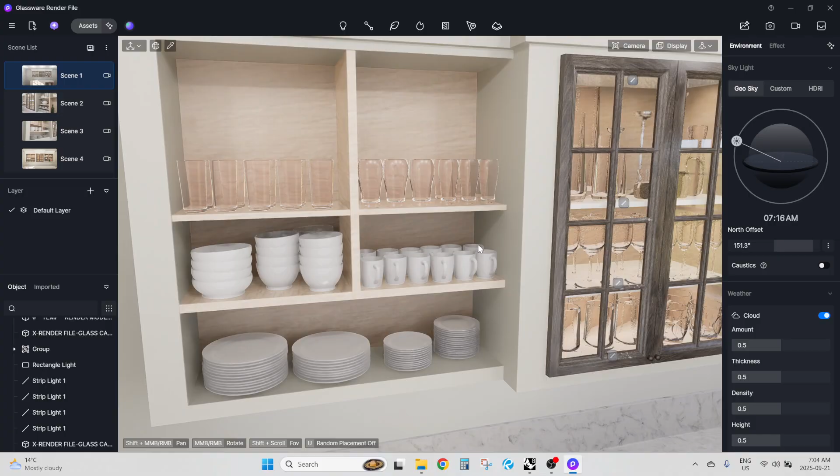In this video, I'm going to go over the first ever asset pack that I'm going to make available for Rhino 3D.

I created this because I was just getting killed on my rendering jobs where I need to model a bunch of small elements, and nothing you'll see is really that hard or that challenging to model.

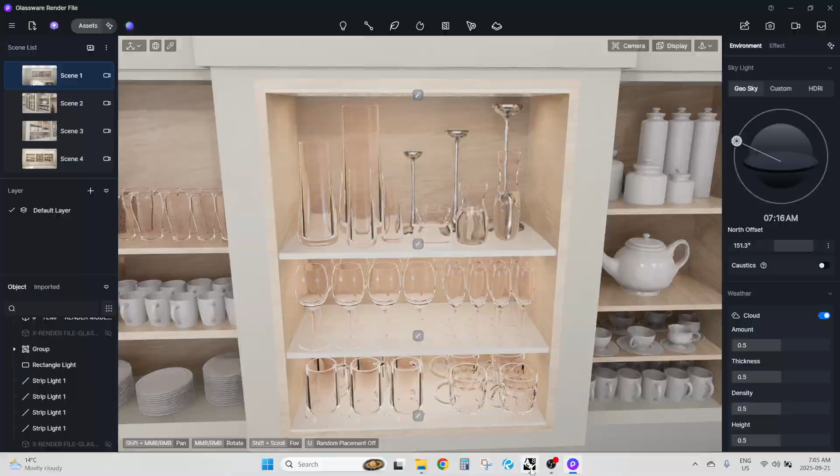Like a lot of these glasses, they might take a minute, but that's 1 minute, 2 minutes, 3 minutes. And then, to be honest, the real work goes into placing the objects, because you'll create your glass. Right now I believe I have the base point of these set at counter level. I think I'll have to reset the gumball to demonstrate that.

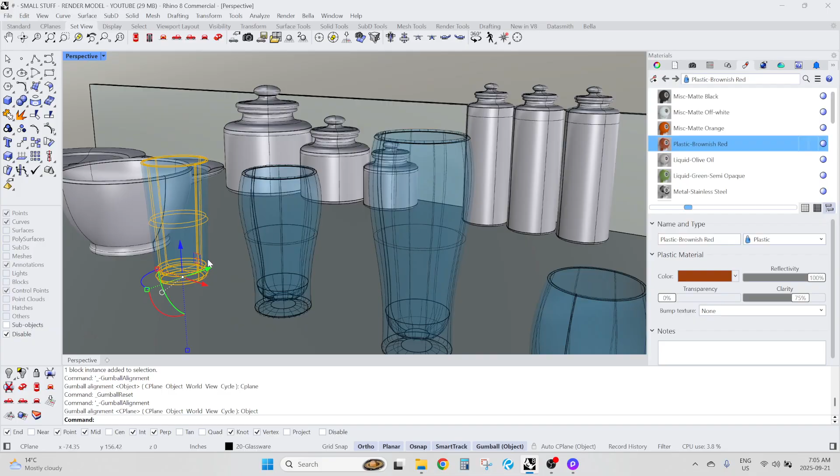And that in itself will save you quite a bit of time. So yeah, the real work is, I guess, just organizing and placing stuff.

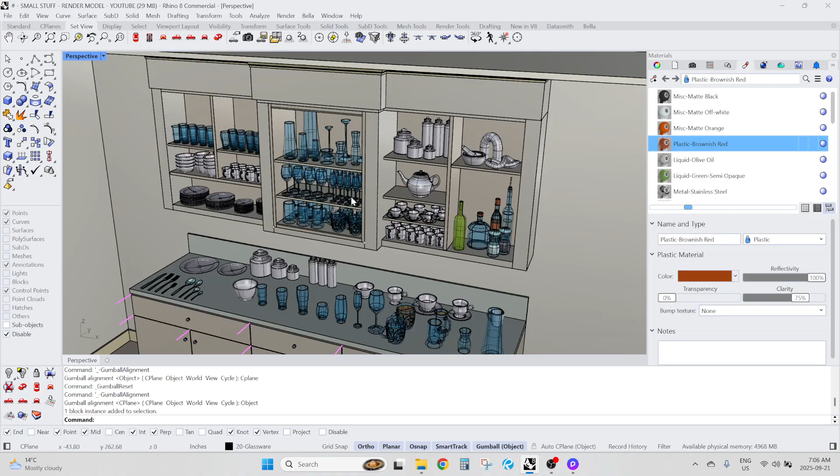So I found with other asset libraries, it's like they want you to take one item at a time, whether you import it into Rhino or download it one by one after scrolling through an asset library. I was just finding that so insanely slow. So I created this after dealing with that on a previous job, and I've used this once, and it's already saved me a whack of time.

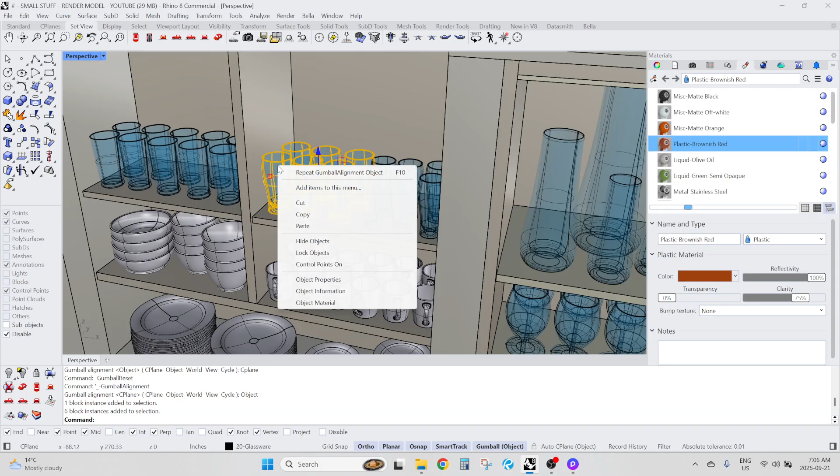But instead of, say, importing an object, all you'll do here is have two Rhino sessions open. You'll do Control C, copy, and then go into that other file, the one with your job in it or whatever you're working on, and then Control V. And of course, you'll have to place it, but that shouldn't be too challenging.

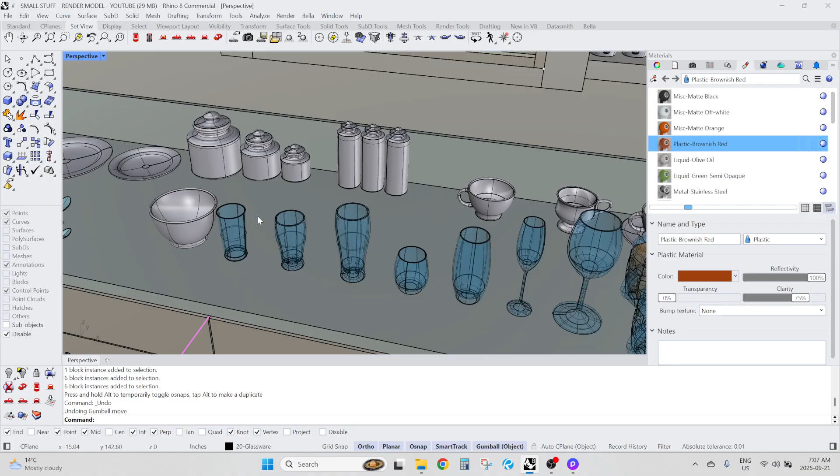Okay, so there's not a heck of a lot included in here. There's quite a bit of small, simple models, I guess, but you're going to run into situations where you need a slightly different shaped bowl, a slightly different shaped glass. These plates are actually the same block, just scaled, right?

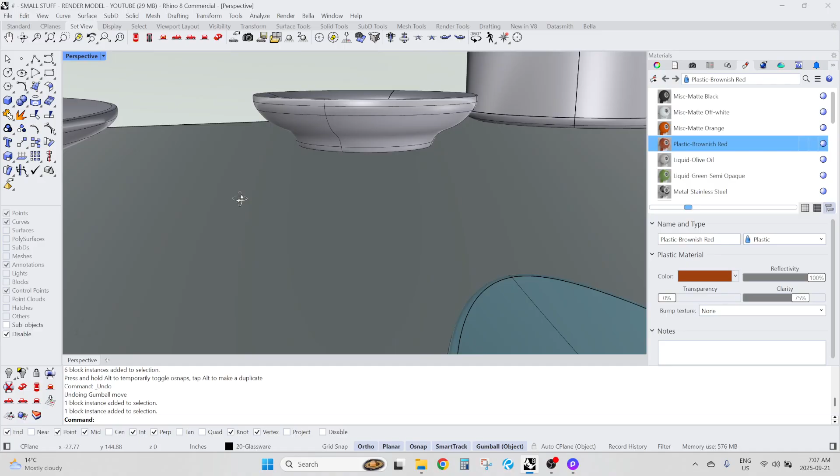So if I do 0.5, 0.5, now that almost looks like maybe a butter dish or something if we stretch that out like that, right? So you get a lot of flexibility just by modifying these blocks.

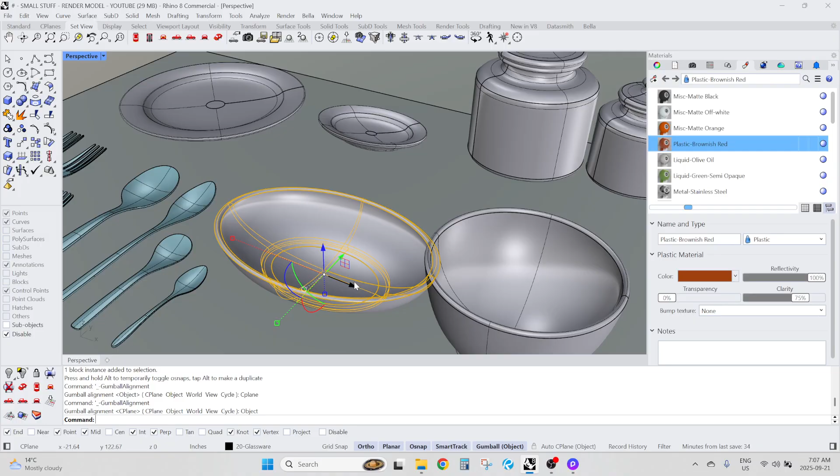We'll take this, make sure the base point's at the counter. I got a hotkey to switch the gumball alignment from C-plane to object. So do that, we'll do 0.5. Let's do 1.5. So that went from a cereal bowl looking thing to more like a bread bowl, I guess.

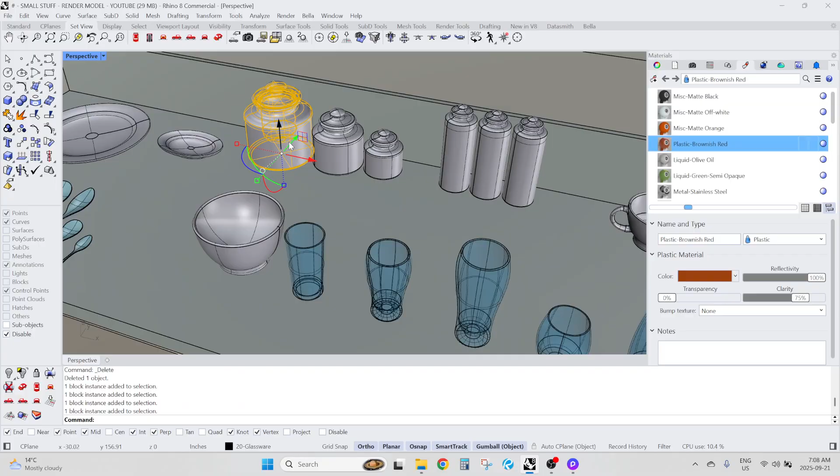Similar with glasses, you can change the shape of them. Some stuff, these are all the same block, but if I try to go from this to this, that won't work out too well. So let's scale this.

I kept accidentally hitting shift. So if you want to scale uniformly, you're going to hit shift and then click. But if you want to scale just one axis at a time, you'll just click and scale, right?

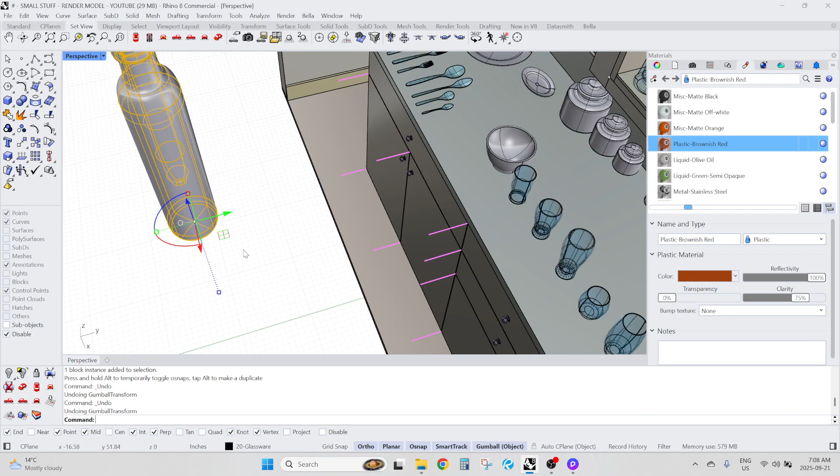But yeah, if I scale that, I don't think we want this bottle to look like that. It's more of a spice jar, I guess, but if we scale it like that, we create a bit of a mess. So in that case, what you do is explode, Control Shift select, and now we can just stretch that up.

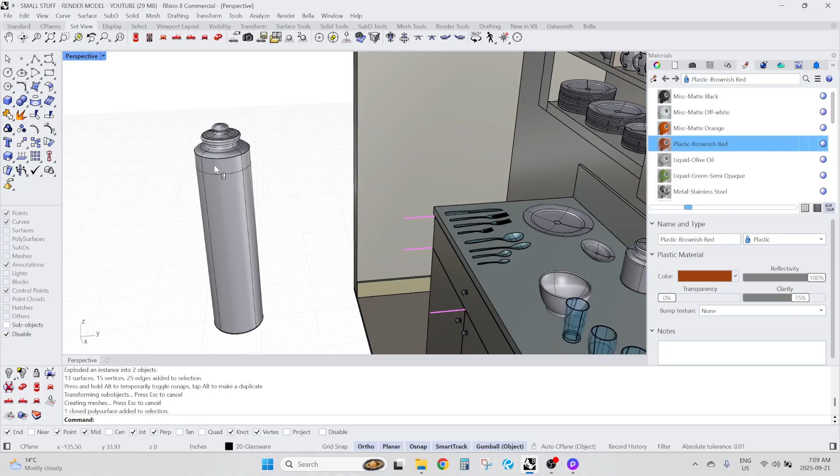Some weird stuff going on inside there, but whatever. I modeled the inside just to save a bit of memory. So I'll make sure I don't grab a corner of that and go like that. Looks a bit better.

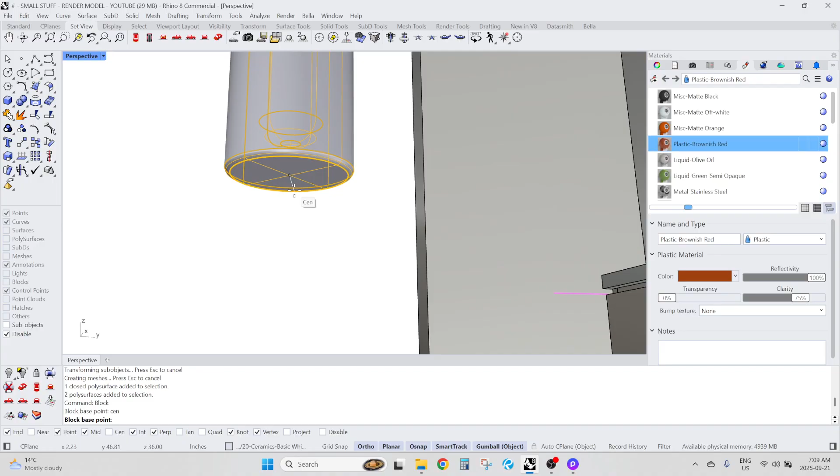So then I just do block, select the base point, try to get the center.

So now if we want to place that on the counter, that's quite easy to do. There, now we got like a little tall, narrow spice jar thing going on. I like using this grip because it makes things look a little more random.

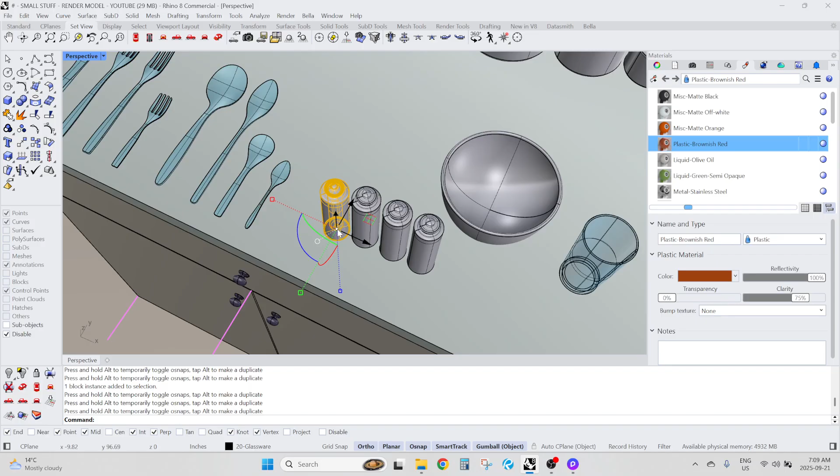So call that minor surgery. Let's grab this guy. I can make this look like a wine glass just by scaling these like that. I can try to shrink it like this.

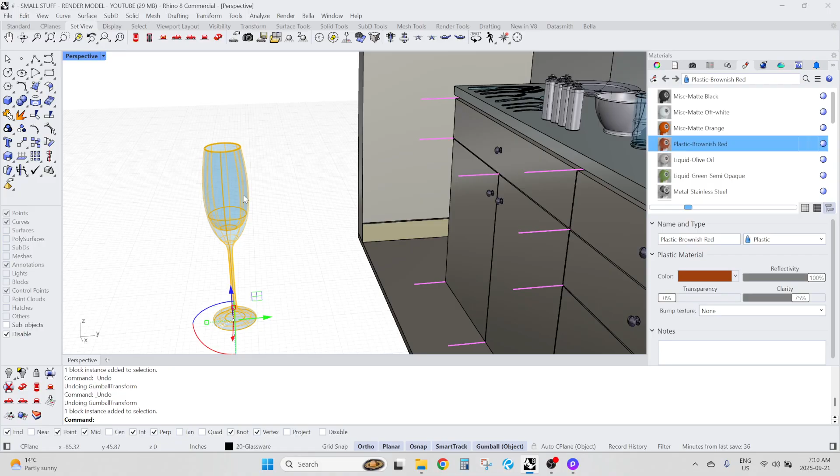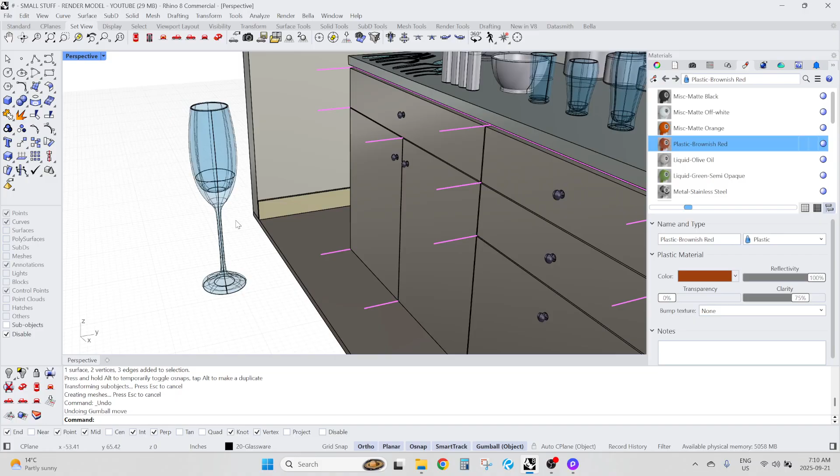Actually, let's explode this. Let's do a sub-object selection. Control-Shift window. If we do that, it doesn't get too good of a result. Actually, that does look kind of cool, doesn't it? But not quite what we want here. So what I'm going to do is explode this guy.

So this should all be surfaces now. What I'm going to do is select everything and turn points on. So once you have surfaces, you can just turn on the points.

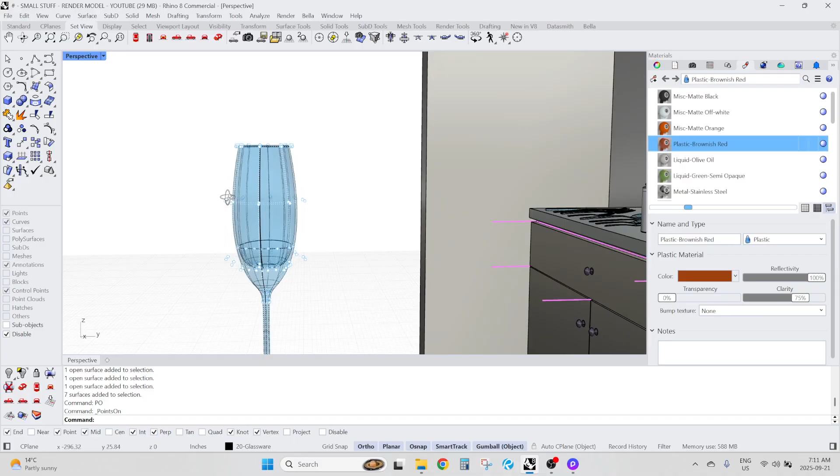Now we will do what I'll call major surgery. Okay, so you can see I messed up a seam in here somewhere. We can fix that by doing match surface.

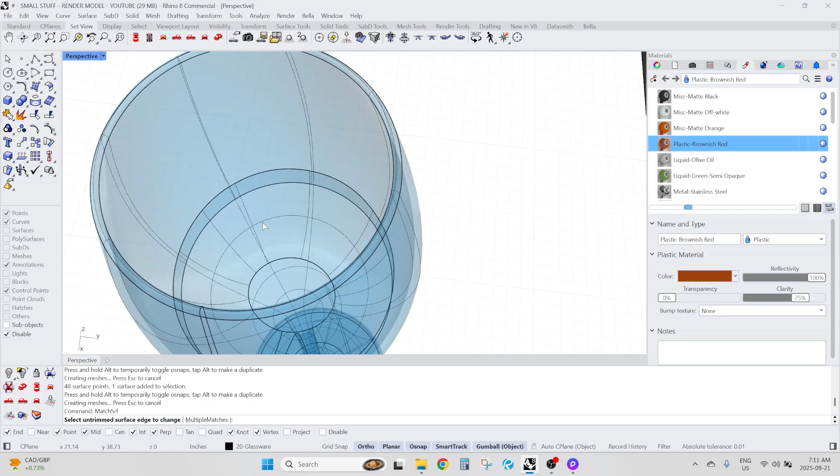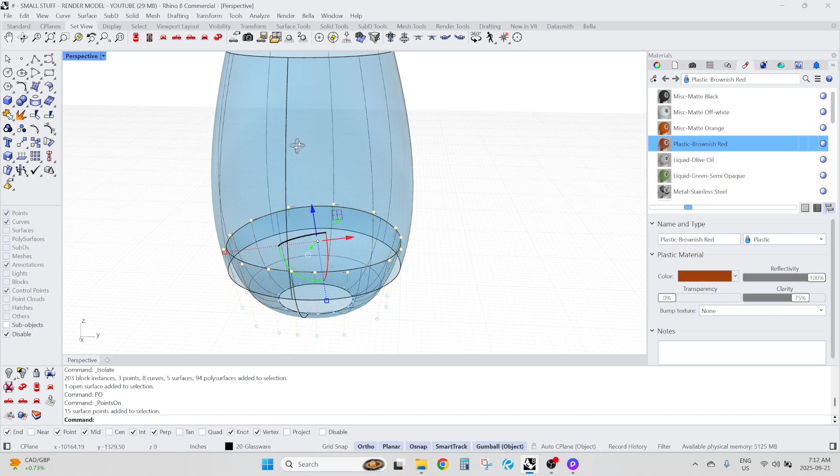If I'm able to get that surface edge. Let's see. Let's be smart about this and maybe isolate these elements. Oh yeah, that's way up there, isn't it? Let's put points on. Set our gumball to C plane, not to object, because that wasn't working too well. Put that there, and now do match surf.

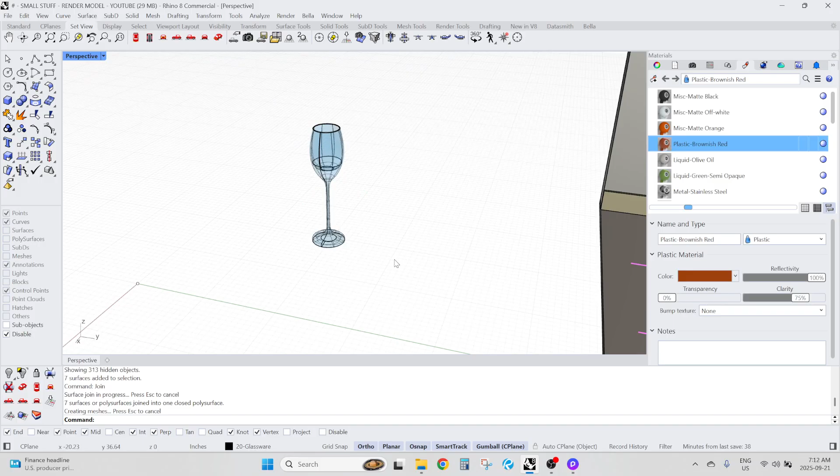So with a bit of luck, that will join into a closed polysurface. Let's just throw a different material on that just so we can make sure it's nice and smooth. We didn't destroy any of those surface tangencies.

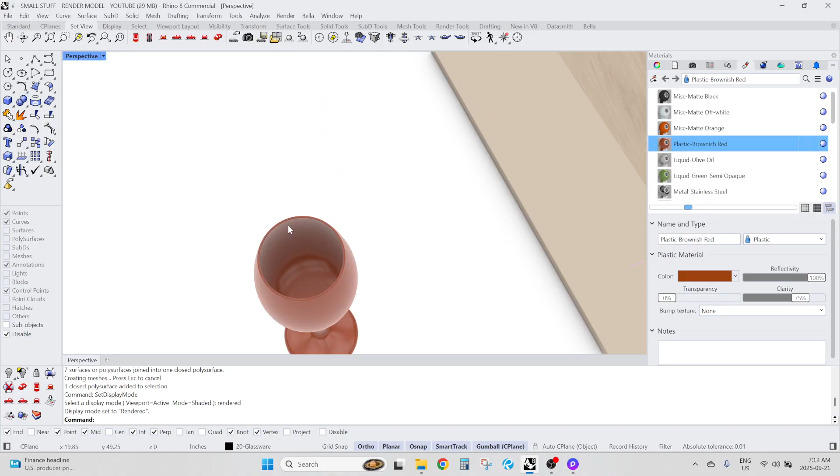So one thing I didn't like that I did is I modeled the bottom of these glasses, like with that concave, or whatever you'd call that. And if you do turn this into a block, you'll just have to be mindful of that. Somewhere along the line, it looks like I messed that up too.

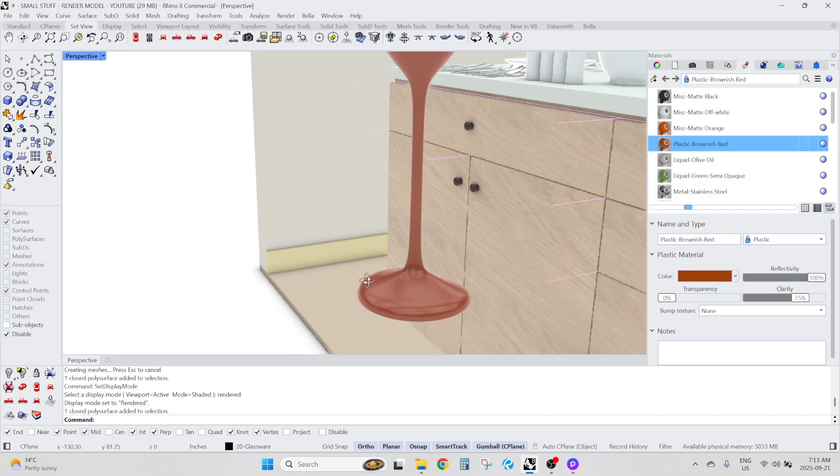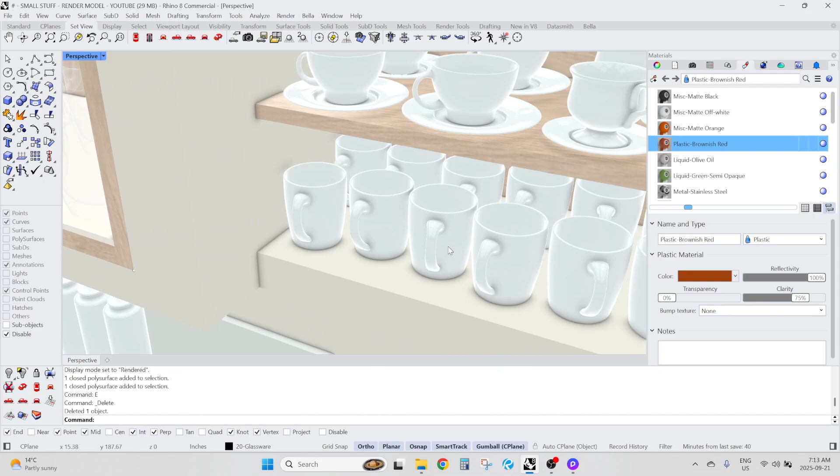But I guess that'd be a situation where I kind of actually want that effect, because I want it to look like the glass is cast the way it would be in real life. So this would probably be rejected in quality control, but for a render scene, that amount of variance and randomness is good. Because what you're going to be doing is, maybe not for a wine glass, but a lot of these things you want to rotate and move them just a little bit just to make it look that much more realistic.

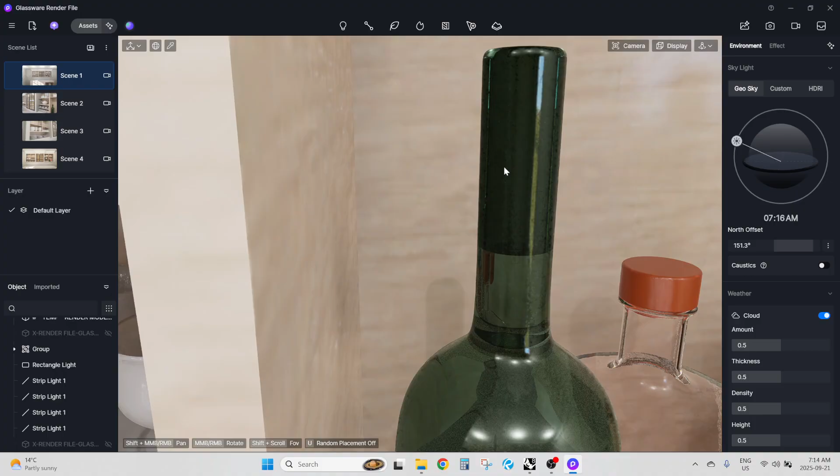I'm thinking about including tableware in this. Maybe what I'll do is upload this, make it super cheap, and then get some feedback, and then include tableware with it at a later date, and maybe include a few more bonus items. The good thing about this asset pack is that you're kind of getting a preview of some other stuff.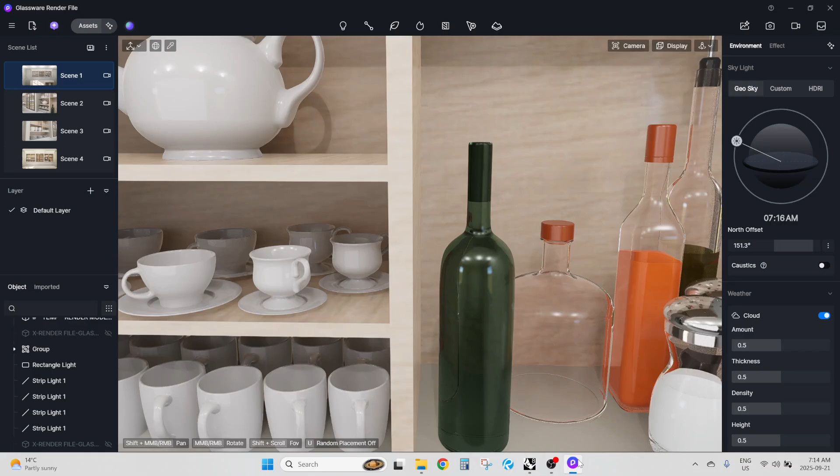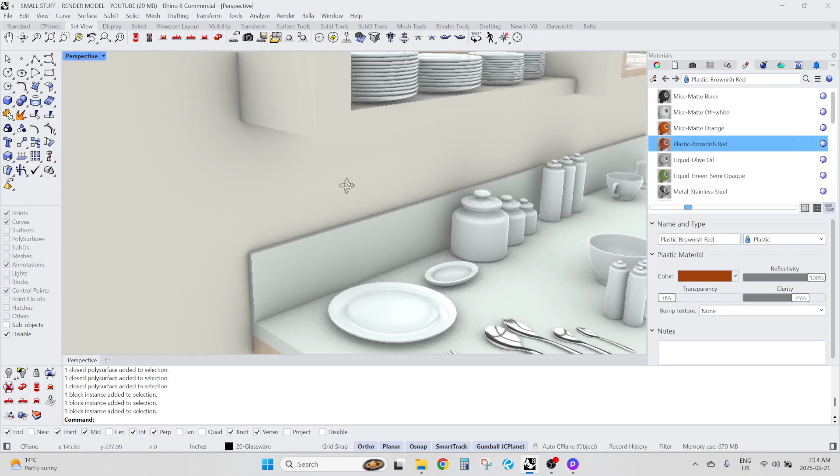As you can see, I got a lot of millwork in here, so you're going to see like 75% of how I'm doing millwork in Rhino right now. And maybe if this is popular, maybe I'll make an asset pack for the millwork. Same goes for other stuff - appliances, wall fixtures like plugins, light switches that I want to include, stuff like that.